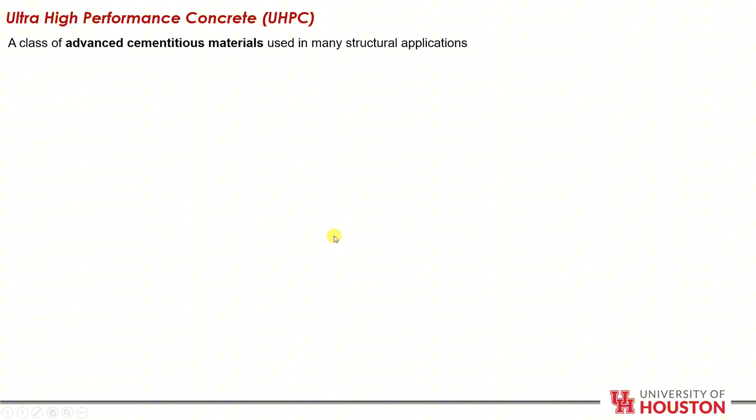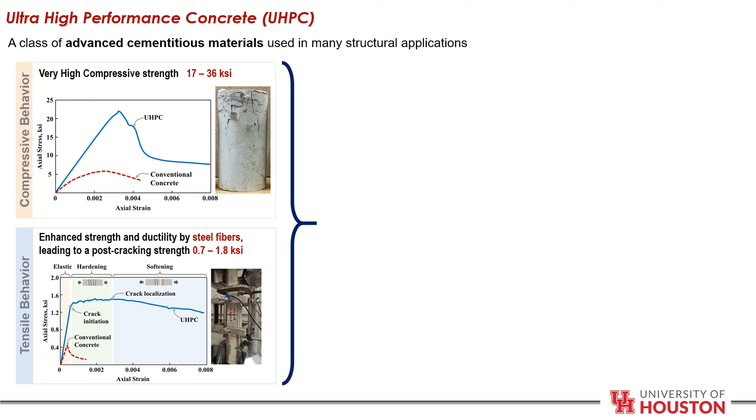So, UHPC is a new class of cementitious material that has been used in many structural applications. UHPC is characterized by its very high compressive strength, surpassing normal concrete by more than 5 times, and it has a very enhanced tensile behavior, given that fibers work in bridging the cracks and increasing the post-cracking strength, allowing more ductile response.

Given the enhanced mechanical properties of UHPC, it's a good material to build durable structures, given its very low permeability that is less than 10% of that of regular concrete, which could be a better solution in harsh environments, as we know that many bridges in the United States are aged and they need to be repaired. 7.5% of them are structurally deficient.

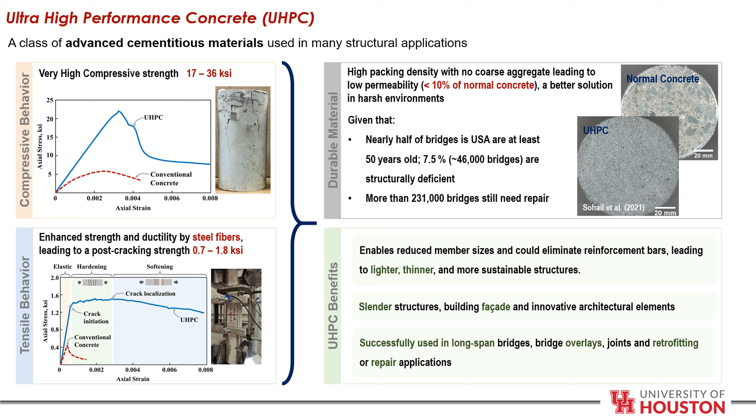So UHPC can be used in many structural applications, reducing the member size and reducing the self weight of the structure, and also eliminating the reinforcing bars. And it has been used for building facade, and it has been successfully used in long span bridges and bridge overlays.

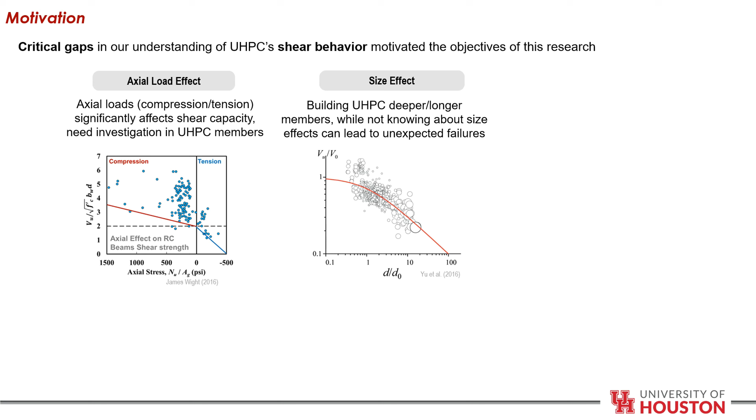The motivation of this study is derived by the critical gaps in the understanding of shear behavior that is presented in three different tasks. The first one is investigating the axial load effects, which is a key parameter influencing the shear behavior of regular concrete. This phenomenon needs to be investigated in UHPC. The second one is the size effect. As we know, in concrete structures, enlarging the structure size does not necessarily increase its shear capacity. That phenomenon is investigated for conventional reinforced concrete, while in UHPC it needs to be investigated.

Fiber alignment effect is a very important parameter to be investigated for UHPC behavior, given that the tensile strength of UHPC is highly influenced by the fiber orientation. So this was part of my research, to investigate the fiber alignment and its impact on the shear strength of UHPC. These three tasks will lead to two important outcomes.

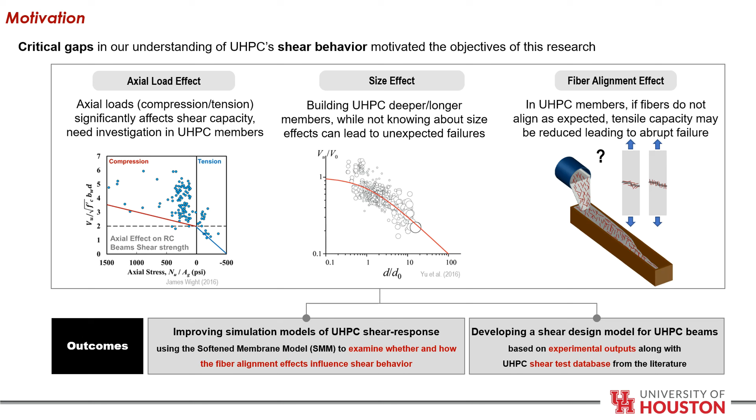The first one is improving the simulation of UHPC response, adopting the softened membrane model, while examining how the fiber alignment can influence the shear behavior of UHPC panels. The other outcome is developing a simplified shear design model based on the lessons learned from the panel tests, along with a shear test database from the literature.

The machine used in this study is the Universal Panel Tester, which is a multi-axial testing machine at the University of Houston Structural Lab. It has been successfully used for constitutive modeling of RC structures, and it's adopted for testing UHPC panels and investigating their shear behavior. It's the only machine in the United States, and it has 37 in-plane actuators and 17 out-of-plane actuators with 3 rigid links for structural stability.

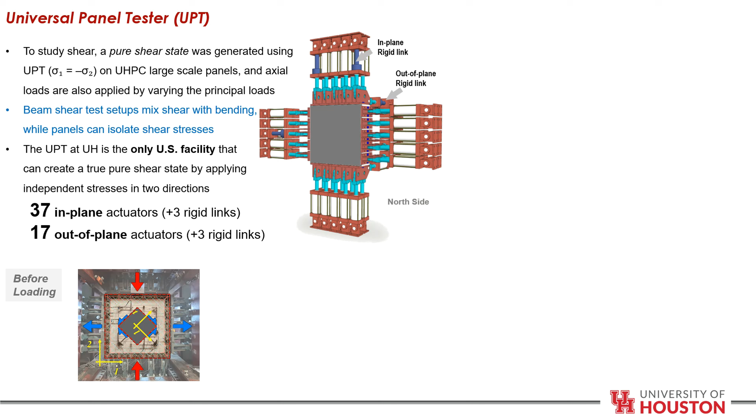The test mechanism follows the Mohr circle, where the biaxial loads are applied in the principal directions, and the element under shear test is rotated at 45 degrees. So as we can see, after loading, the element will experience shear stresses oriented at 45 degrees. And here's a video demonstrating the test.

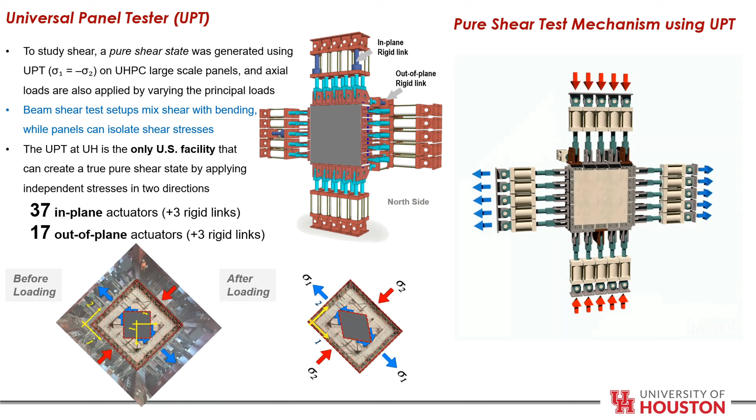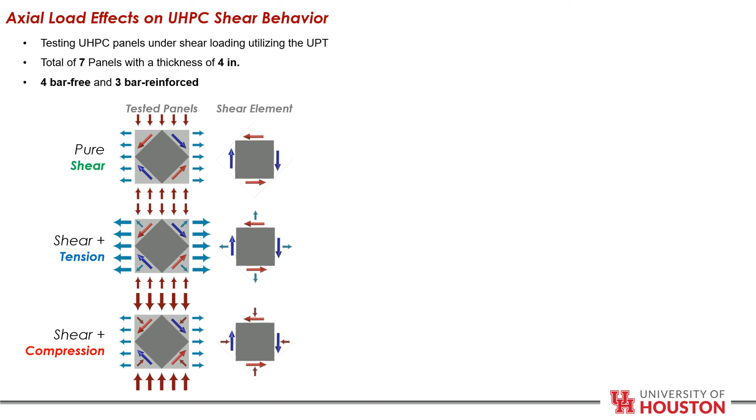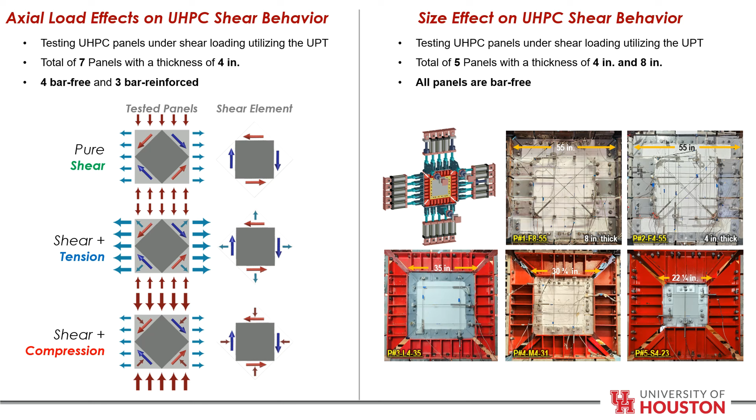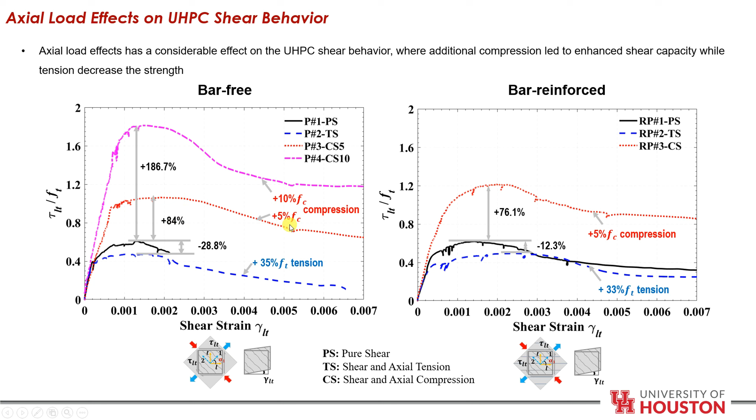The test matrix consisted of a total of 7 panels under pure shear, shear with tension, and shear with compression. On the other hand, the size effect study was conducted utilizing a total of 5 panels with 4 inches thickness, all of them except the first panel, which is 8 inches thick. The results showed that additional compression and tensile loads highly influence the shear response of UHPC. As we can see, increasing the compression force by 5% of the compressive strength increased the shear strength.

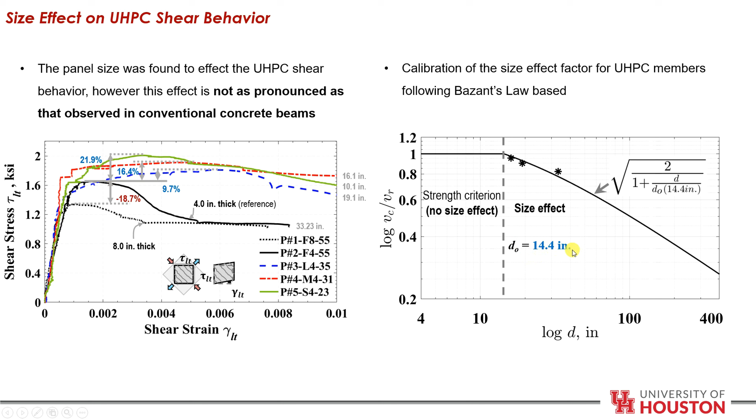On the other hand, the depth of the panel also influenced the shear strength of UHPC panels. As we can see here, doubling the thickness decreased the shear strength by 18%, while decreasing the depth increased the shear strength by 10% to 22%. The results from the panel tests under the size effect study were utilized to calibrate the size effect factor, and it was found that a characteristic depth of 14.4 was adopted, beyond which the size effect is significant and needs to be considered in design.

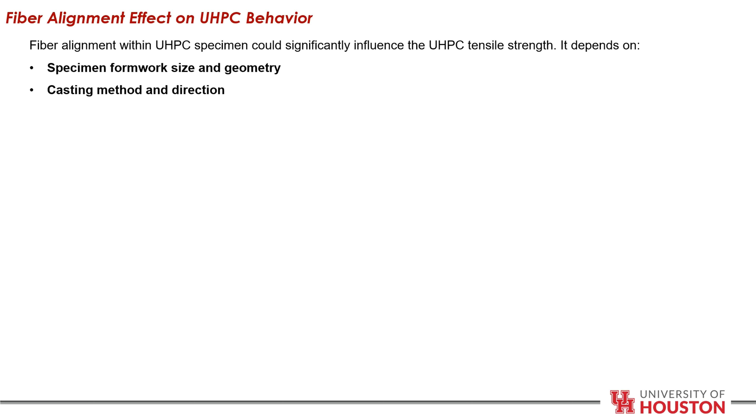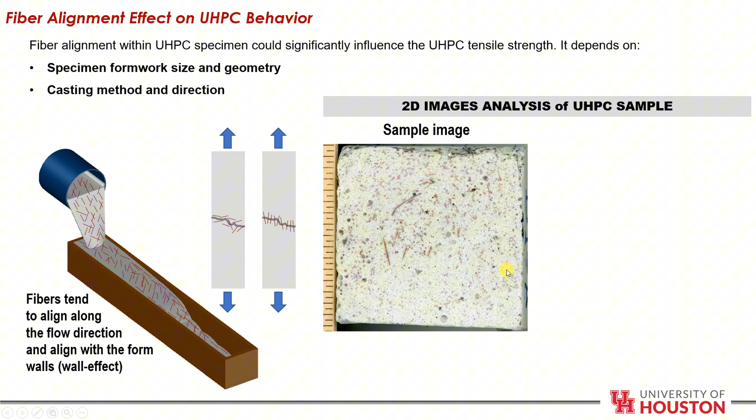The other part of this study is the fiber alignment, which is a key parameter in UHPC tensile strength, and it depends on the specimen formwork size and geometry and casting method and direction. So if fibers are aligned in a favorable direction, the tensile strength will be enhanced. Otherwise, there will be variation in the tensile strength response of UHPC. The study was conducted by extracting specimens from the panels and analyzing the images, and based on the area of each fiber through the section cut, the fiber orientation was calculated.

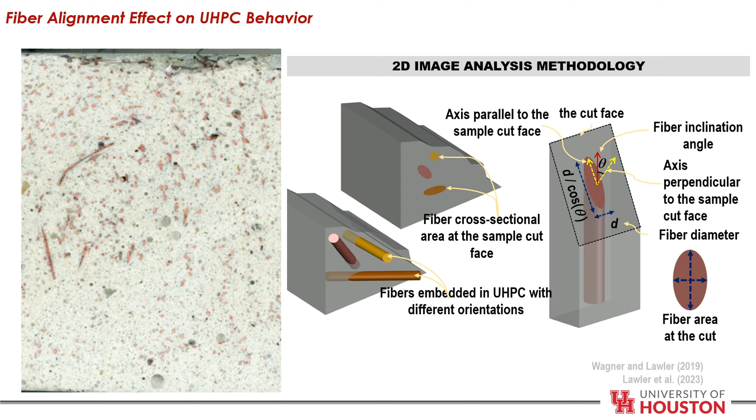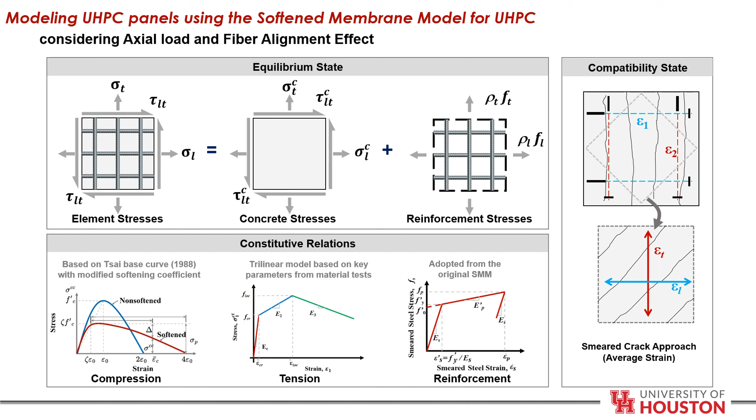The fiber alignment study resulted in a fiber alignment factor that was adopted in the softened membrane model, which is an analytical model used to simulate the shear behavior of UHPC panels, which consists of the equilibrium equations and the compatibility equations and the constitutive relations that were modified to suit the UHPC behavior. So the fiber alignment factor was applied to the tensile constitutive law of UHPC, and the results showed enhancement of the shear modeling response of UHPC when the fiber alignment factor is adopted. As we can see, ignoring the fiber alignment factor resulted in 44% overestimation of the peak shear strength.

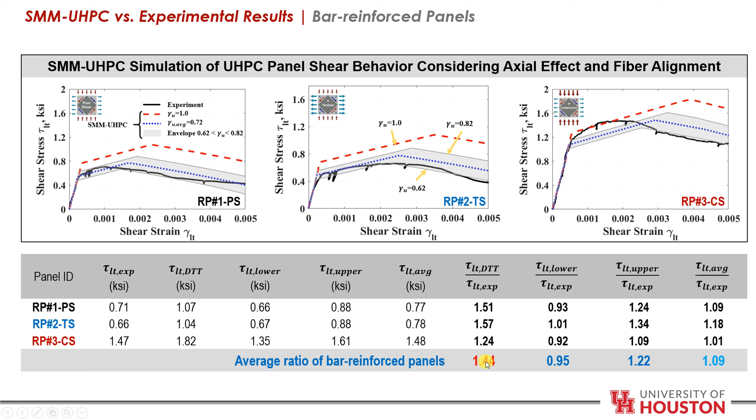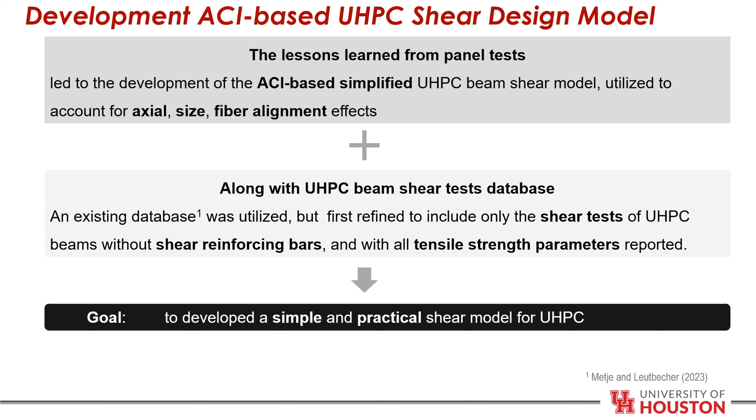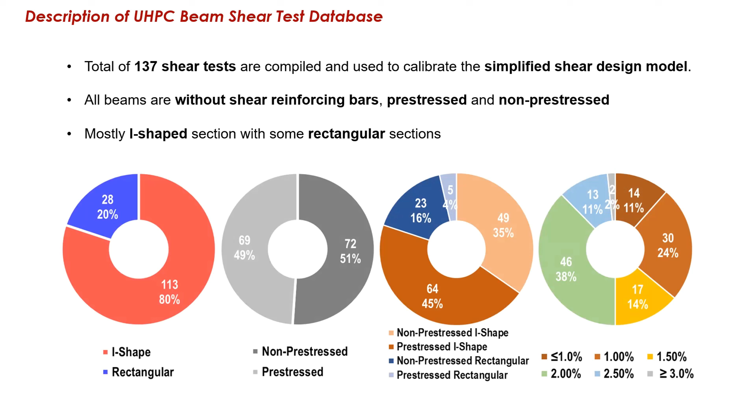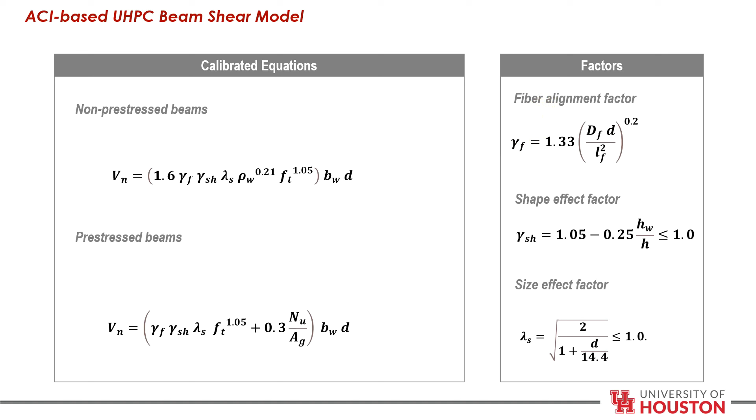From the lessons learned from UHPC panel tests and the calibrated size effect factor, along with the shear database from the literature, a simplified and practical shear model for UHPC was calibrated and presented. The database consisted of I-shaped and rectangular sections, non-pre-stressed and pre-stressed, and the calibrated equations are summarized here. As we can see, 2 equations were proposed for non-pre-stressed beams and pre-stressed beams, and 3 factors were adopted to account for the fiber alignment phenomena in each, the shape factor, and finally the calibrated size factor.